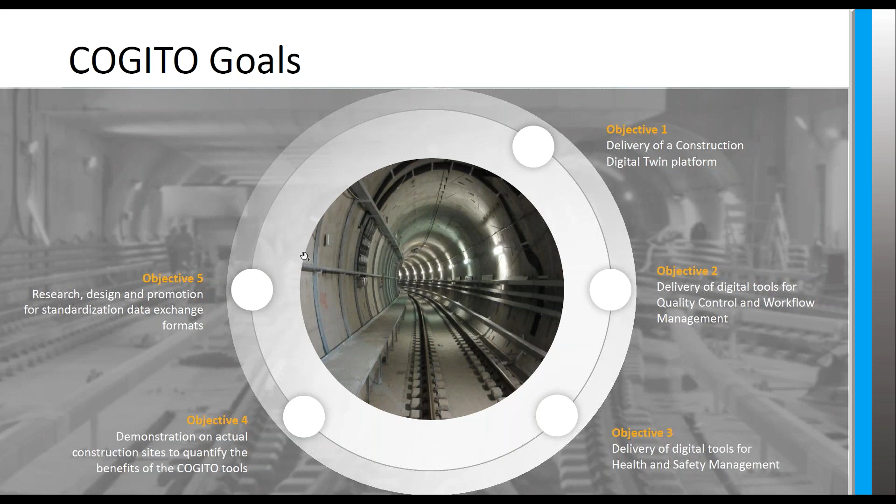The fifth business exploitation and knowledge transfer objective, to research, design, and promote the data exchange formats that facilitate the interoperability of the construction digital twins with future evolutions of the building information model to relevant standardization bodies. And finally, to promote the adoption of the COGITO solution through intense dissemination and knowledge transfer of the project outcomes toward the targeted stakeholders, reaching out to audiences within and beyond the European Union.

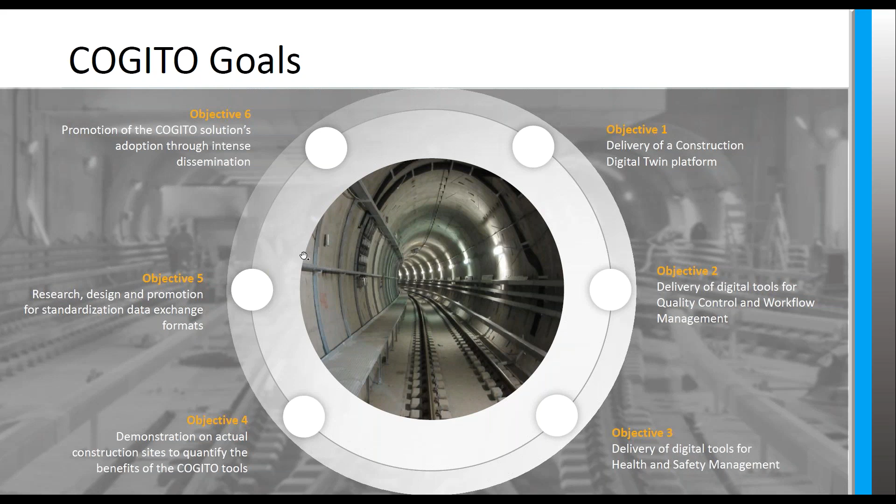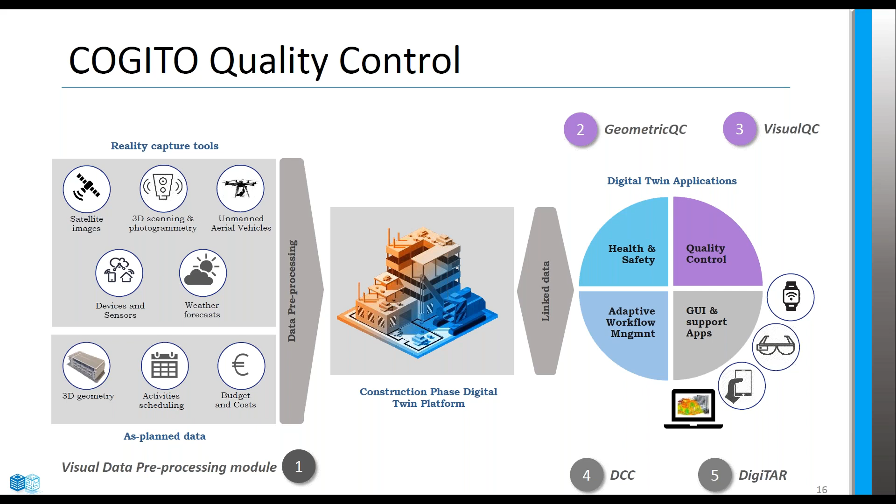Today, we are presenting the quality control services and relevant user interfaces, starting with the visual data preprocessing module, responsible for acquiring the data required as input for the quality control components, the geometric quality control and the visual quality control services to semi-automatically detect deviations and defects of erected construction elements, and finally DigiTAR and DCC for visualization purposes of the quality control results. And that's it for the introduction of the COGITO project.

I'll pass the floor to Agnieszka with regards to the first poll that we mentioned before. Yes, we have 2 questions in the beginning, just to know your background, so we can move to the first question. What do you know about digital twin? We just want to know what is your background. Do you have the knowledge already? And do you have maybe a practical experience with digital twin? So please vote.

If we have already the answers, we can, I think, move to the next question. What do you know? Now we have the answers here. So most of you know the concept. That's very good, as we will be getting into the details in the remaining part of the presentation in the webinar.

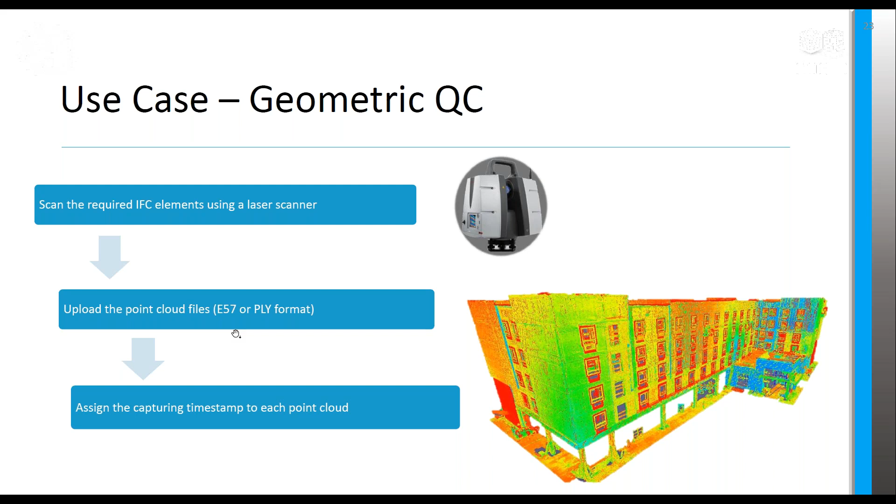Now, regarding the use case of the geometric quality control, the user first scans the required IFC elements using a laser scanner and provides, as you can see here on the right, the 3D scanned model of the building. And then these are uploaded as an E57 or a PLY format file using the visual data preprocessing toolkit front end. They are assigned the capturing timestamp, and then they are forwarded to the digital twin platform.

On the visual quality control side, a photograph of the required IFC elements is associated with the element. The metadata goes along with the image in question. Some processing is performed if necessary, for example, cropping an image or filtering some element, and then they are uploaded to the digital twin platform as well.

Now, the image processing side, as I said, involves cropping, resizing, Gaussian blurring, contrast modification, or brightness modification. These are additive, so a user can select one or all of these to perform on its image. And here we can see an example of how this works in practice. Yes, you can start the video, please.

Now, first, the user signs in with a Keycloak account that is the same throughout the entire COGITO platform. And using these credentials, they are presented with this screen, which is the selection of an existing project, and the project corresponds to the building that we are talking about. So here we have a demo of a school building, and we have different work orders here defined through another tool of COGITO that has some quality control activities ordered for this building.

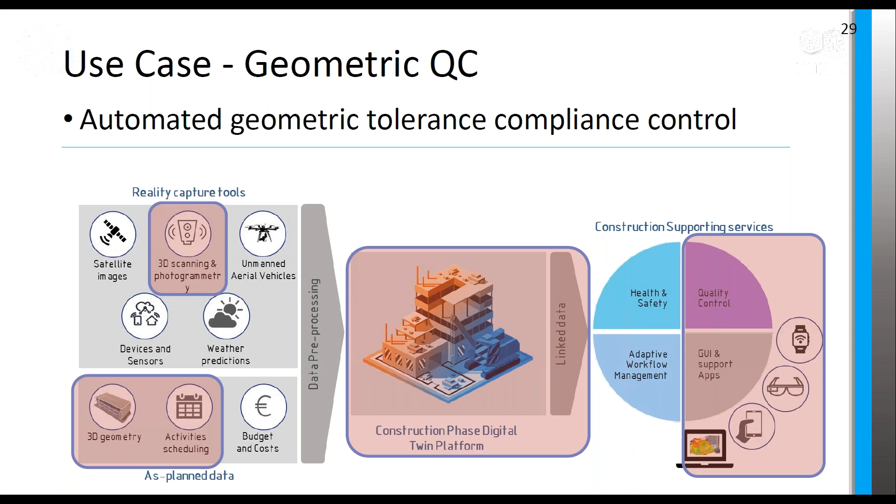So the first part is we divide it in two: the planning and then the execution of it. So during the planning stage, what we need to know is from the as-designed BIM model, and it's a 4D because it's containing the schedule of it, apart from the geometry and the materials and all that relevant metadata information.

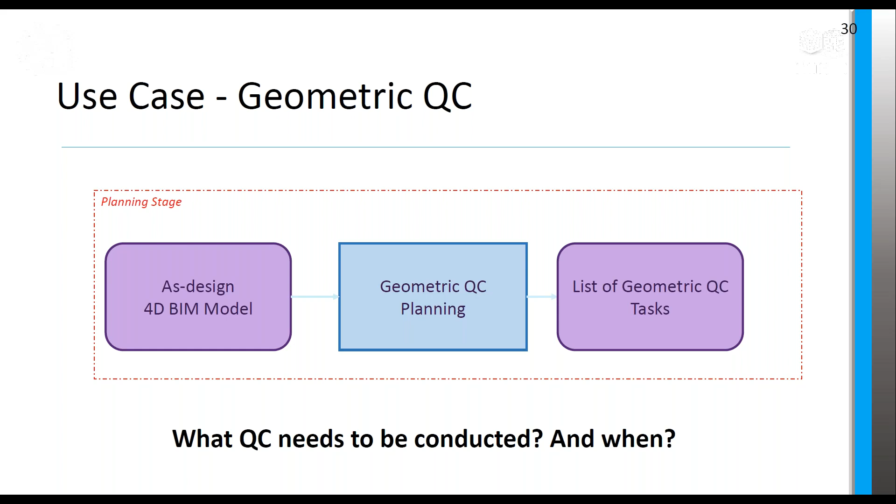We process that to extract the different quality control needs that we need to comply with during the project, and most importantly, when. So after processing it, we are going to get a list of geometric QC tasks that are going to be verified during the construction phase.

So, for example, where do we get those quality control checks that we need to do? We have different sources. The most standard one comes from the rules or specifications or regulations or norms of the different countries, but it also can come from project-specific or user-specific ones. So, for example, if your client requires a more constrained threshold for the curvature or the deviation between columns, you can put it there, and we can analyze it with that threshold instead of the ones that are in the regulations.

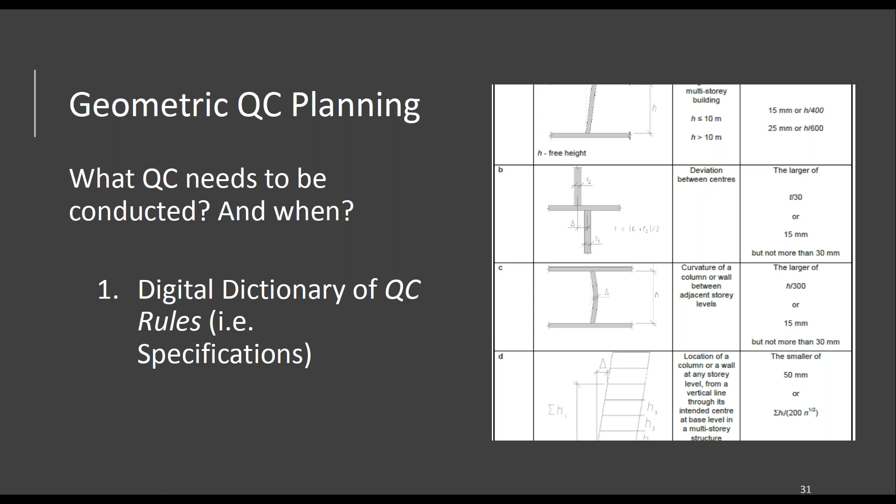So in this case, these ones are coming from the concrete regulation, and it's an ISO standard. So all those values are coming from those rules. You can see here are different rules that will need to be checked during the construction. But these rules are also specific for different elements. So for example, walls, columns, slabs, beams, or the rails for the steel cases, etc. So when you analyze the BIM model, you can extract the different rule instances that you need to check for each of the elements.

So each element will have a type and a material, which is going to be linked to the rules. Those rules, we are saying there is a dictionary of rules, or QC rules, or QC dictionary, whatever you want to call them. They are going to store some metadata. So every time that we go to the BIM model, specifically using the IFC file, we see that element and we say, okay, this element is a column, for example, and is of concrete. We need to verify all these different rules.

But there are some rules that require more than one element. For example, location between a column and a beam, whether the position between them is okay. So in that case, you need to query for both of them, and that requires some relationship between them. So for example, if we go to this IFC or BIM model, we know that we have all those different elements: the beams, columns, walls, and slabs.

And from the rules, we identify these 4 or 5 different relationships between them. So we have the stack of the columns and the walls. The physical connection is mainly between the beams and the columns. Storey adjacency, so it's like one slab on top of the other, and horizontal adjacency between the beams and columns, for example. So in this example project, we identify that there are this number of relationships, which means we are going to need to extract a lot of QCs from here.

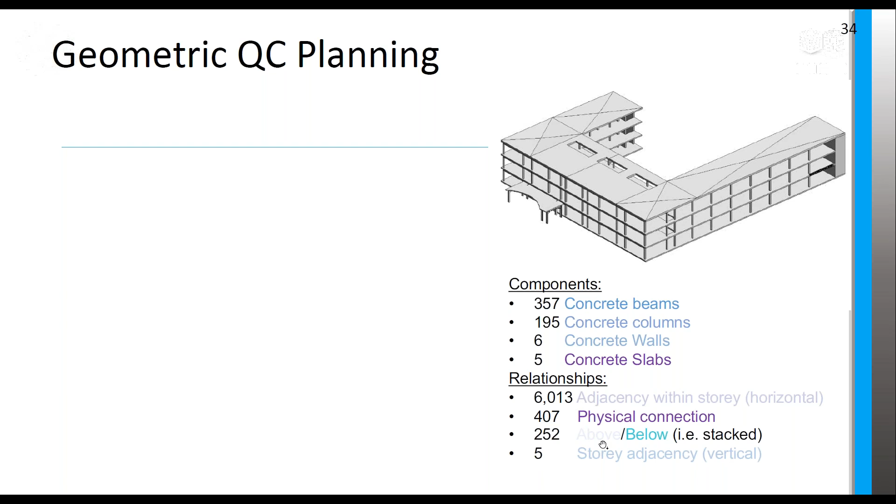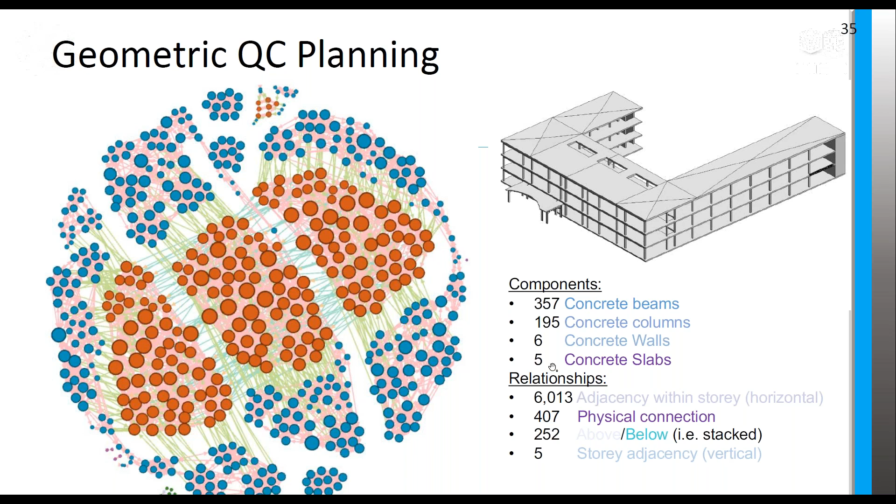But what is important is that from these relationships, this graph and the rules, we obtain a number of different QC rules that we need to verify during construction. So for example, from the dictionary that we have of 15 rules, we know that we need to comply with almost 10K different rules during the construction, which is a lot. We are pretty sure that nobody is going to inspect all of them. But if we do it automatically, we can certainly verify most of them, a huge number of them. So this is only in the planning.

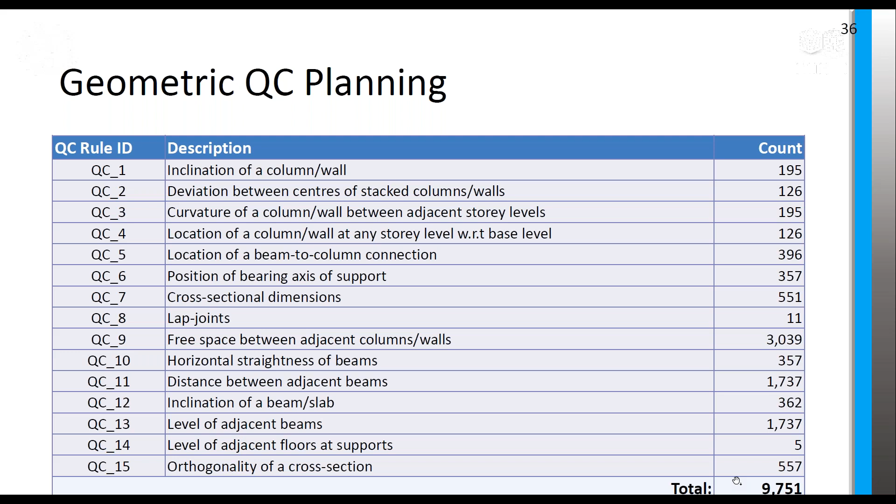But what happens during construction? During the construction stage, we need to combine that list with the as-built data and run an automatic algorithm to do the checking. What we need to do is check which of these rule instances pass, fail, or cannot be controlled because we don't have enough data for it, and why it's happening.

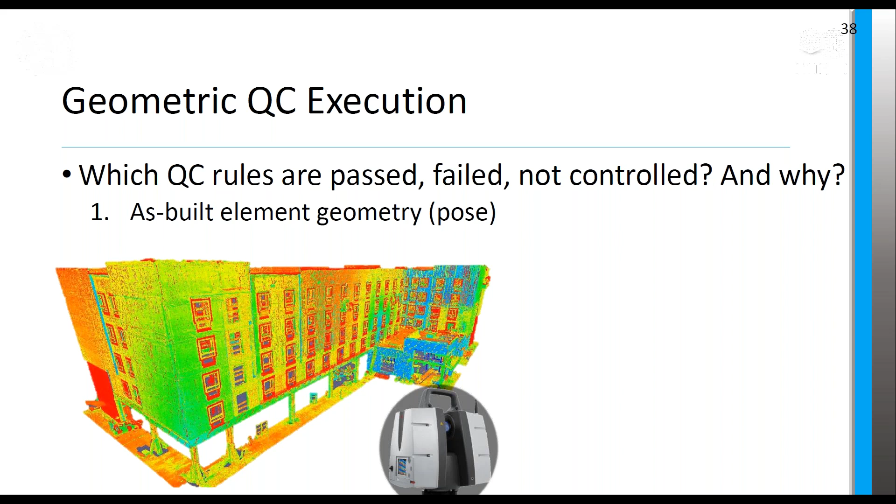So for example, we have a building, and in this case, we're going to use a laser scanner because it's more accurate. But in the future, we cannot rule out other sources like photogrammetry or the Spot robot or drones, which are going to be faster in acquiring the data. Or you can combine those technologies to be faster, for example, or have more accurate data.

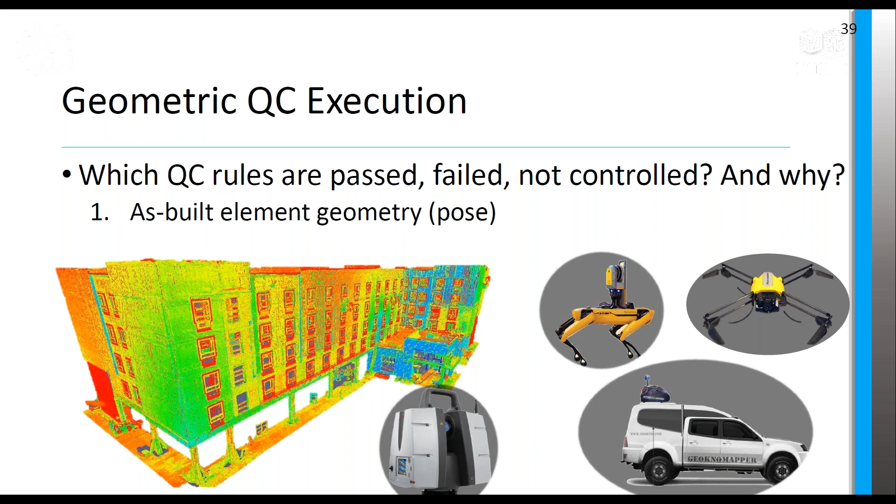So what we do for checking these rules is mainly do a matching between the elements and the design, that's the as-built data and the as-designed data that's coming from the BIM model and the TLS. And we obtain the as-built pose of those elements. So we can use that pose to check the differences and the tolerances between the as-built and the as-designed data, and the values that are on the rules.

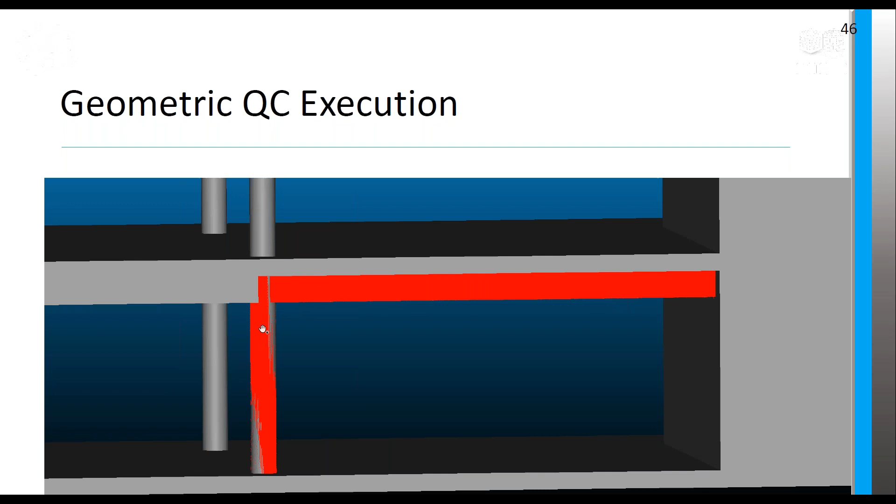But this element also was connected to the column. So it contains another QC instance, which is this one, where we have two components, and the rule refers to QC5 in the dictionary, which is beam to column location. But because it was only an inclination, the connection between them is not going to be affected, the point cloud is affected only on the vertical axis. And in this case, it was a pass. See that the tolerance was 2 centimeters and the difference is only 1.

And also we have the timestamp when we perform the QC. So the quality control staff and the project manager can see when these QC rules were verified, and obtain a report of it with more detailed information to pass it to the different authorities or the clients. And that's mainly the geometric quality control.

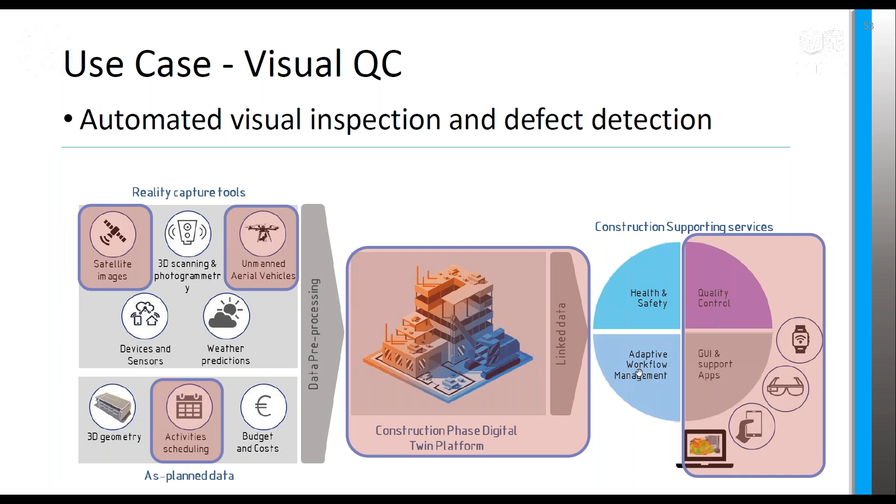So the visual quality control involves the automated visual inspection and defect detection based on 2D images. The data is coming from, for example, satellite images and unmanned aerial vehicles, and they are combined with scheduling for the visual quality control inspections through the digital twin, and then we can perform the quality control inspection and also visualize the results in different user interfaces.

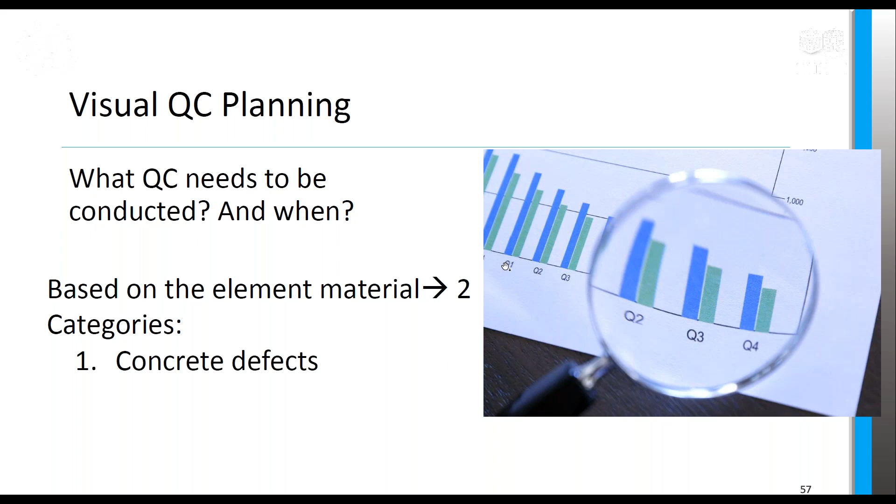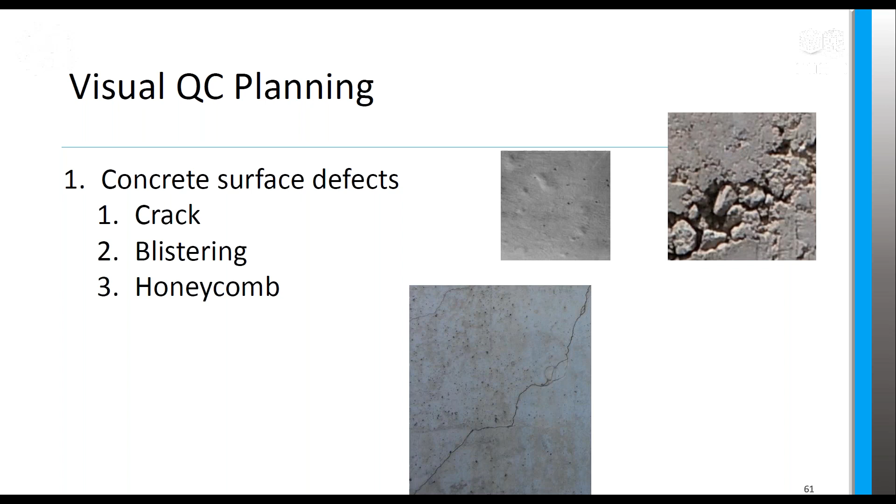Now, what are the quality control needs regarding the visual quality control? Basically, based on the elements involved in the construction, we distinguish between two different material categories: concrete defects or steel defects. For example, here we can see some of the defects that we can detect regarding concrete construction elements: cracks, blistering, honeycomb, efflorescence, or holes present in concrete.

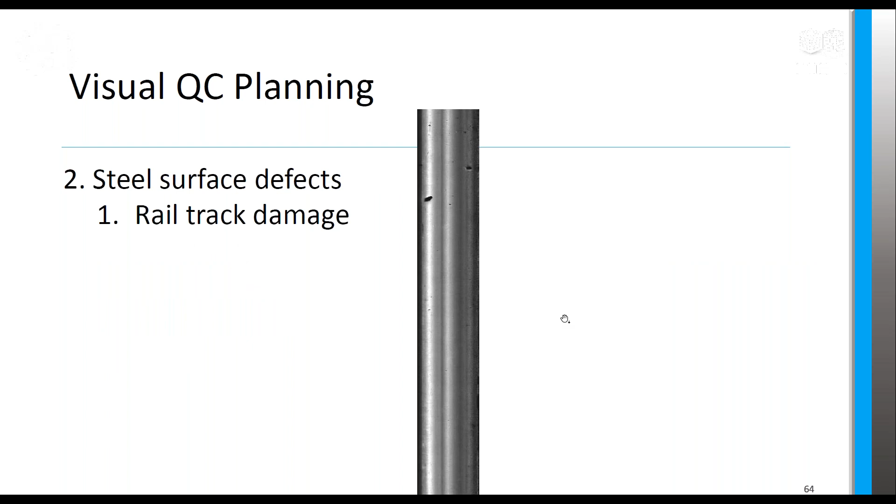Regarding the steel surfaces, the algorithms that we employ can detect defects, for example, rail track damages, pitted surfaces, patches, scratches, and things of that nature. So let's go to the use case. As Martin said earlier, we have the planning stage, and then we have the construction stage, and then we need to check what has been planned against what has been constructed.

Basically, we select the different IFC elements involved in the work orders of the quality control. And then on top of that, we can perform a detection using deep learning algorithms working on the images that we saw before. So the different results can be no defect detected, or a fail and the defect was detected with some confidence, or if the confidence is a bit low and we are not really sure, we can declare an undefined result of this activity. So we have an unknown surface material state.

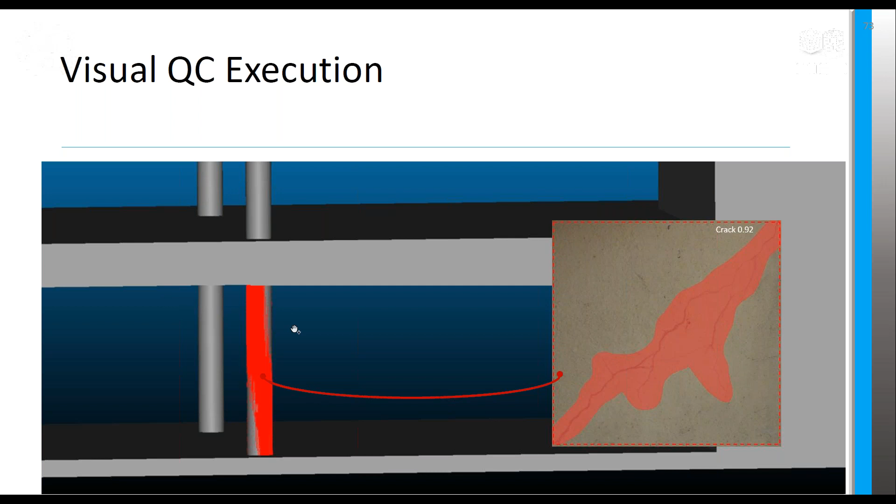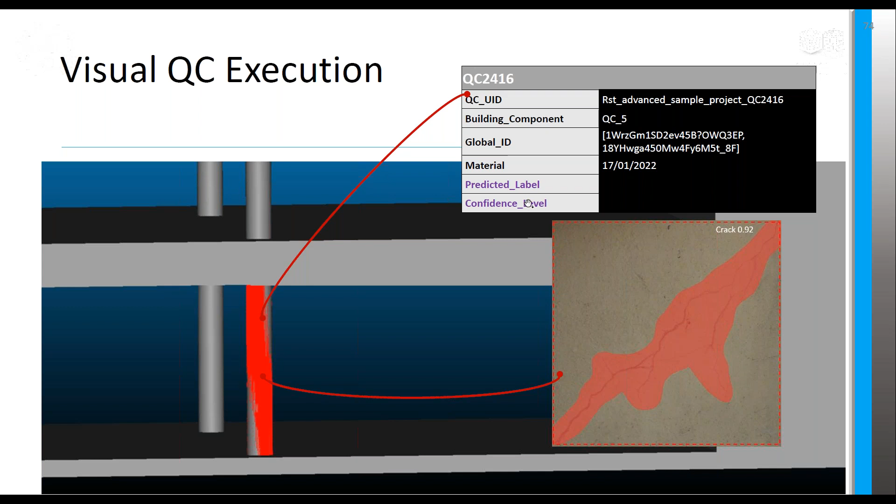So this is an example of what the algorithm performs. You can see here an annotated image with a crack detected and the confidence of 0.92, which means we are 92% sure that this is actually a crack. This corresponds, for example, to an IFC element seen here, a column, and the report that comes out of that is, as you can see here, the global ID of the element, the material was selected as concrete, and the predicted label, which is crack, and the confidence level, which is 92%.

All this, along with different elements of the COGITO project, is then passed on to different user interfaces. One of these interfaces is the DigiTAR, which is the on-site augmented reality-based digital twin information visualization and decision-making tool, which is an application running on HoloLens devices.

And the scope of this tool is first to visualize the results of the quality control components, both the geometric and the visual. Second, to visualize potential construction and site hazards for health and safety issues. And finally, to collect as-built data as part of the visual data preprocessing tool that you saw earlier, acting as a capture device, basically using the camera of the HoloLens head-mounted display.

Now, regarding the architecture of the visual quality control tool, basically we take the images coming from the visual data preprocessing toolkit, the elements coming from the digital twin platform, the work orders coming from the WODM tool of COGITO, and based on this, we can provide within DigiTAR a 3D IFC viewer, so the user can see the 3D model of the as-planned building.

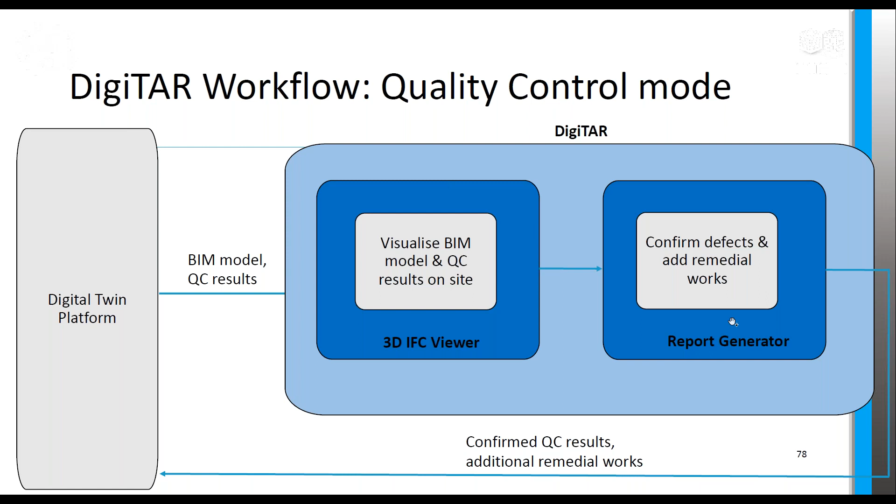The process goes like this. The user first logs in to the application, they select the construction project, and then they select the quality control mode, visual or geometric. They receive the IFC model and the QC results from the data platform. They can perform the registration of the 3D model onto the real world construction site. And then they can view the geometric and visual quality control results on top of the physical building. And finally, they can confirm or reject the quality control results and add the remedial works.

This is an example of how the 3D model is demonstrated within DigiTAR, and the quality control results are demonstrated in this kind of user interface report, where you can see the quality control rules, timestamps, description, distances, scalar results, and tolerances regarding geometry quality control results.

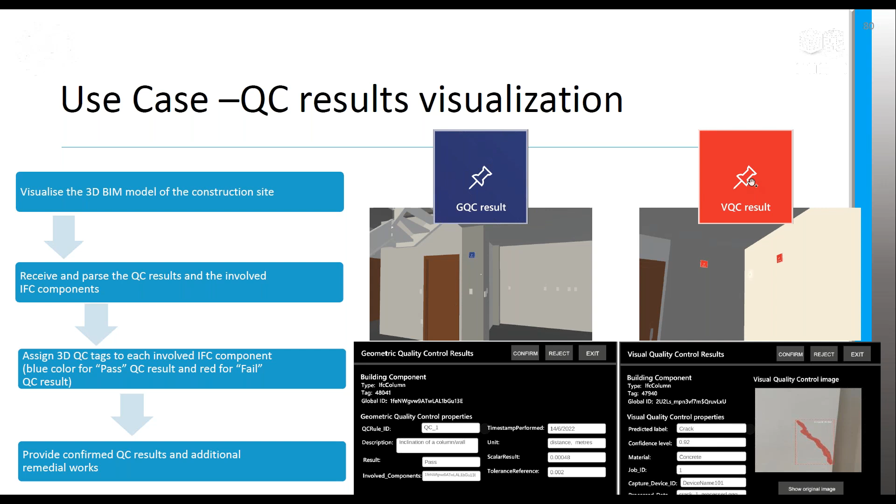And for the visual quality control results, the user can see the image as it came from the visual quality control tool, along with its annotation and the confidence level and the type of material the detection was based on. And on the top here, you can see that for a passed quality control result, you can see a blue annotation on the building, and for a failed quality control, the user can see a red annotation.

We can go on now to see a demonstration in video format, and you can see how this works on the HoloLens device. Yes, if you can start the video.

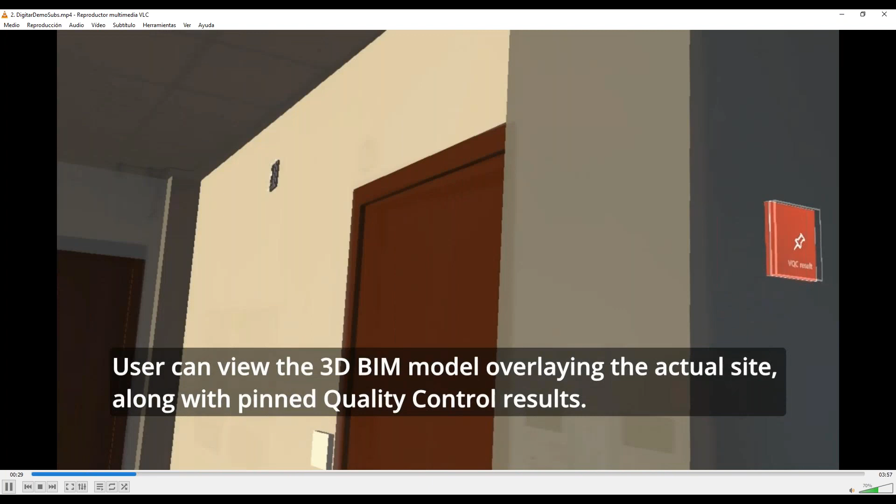So, first of all, again, with the same credentials as before, the user logs into the COGITO system. They can select the project, and they can select what type of activity they will perform: pre-processing, quality control, or safety control. In the quality control here, they can select to visualize the model on top of the building, overlaying the actual site. Here is of course not a construction site, but a demonstration area we have in CERTH.

And they can have all the visual quality control activities that we performed attached to all the elements. And you can see here the red color indicates some quality control results that have been with a fail result.

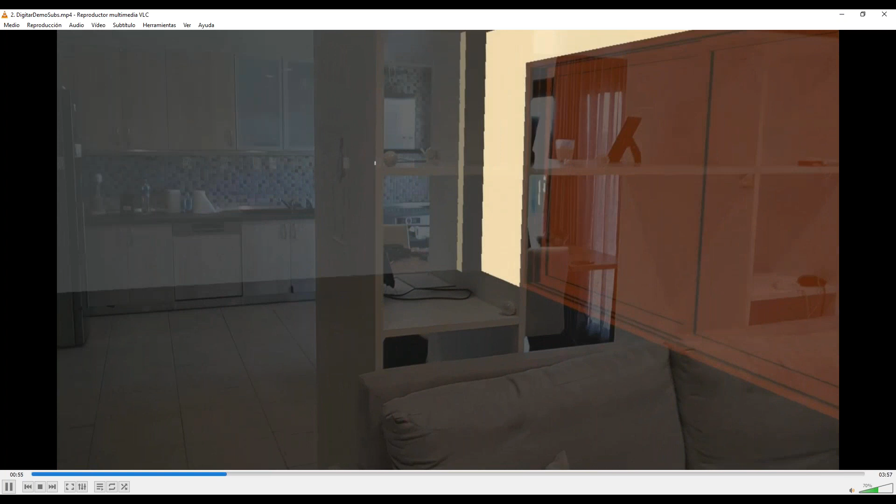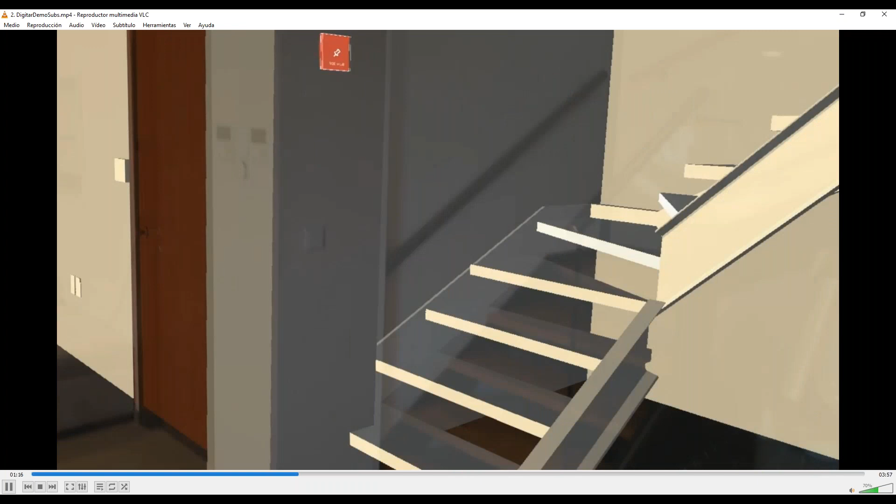And the user, as they go around, the model is registered to the actual building, and it follows the physical space. Now, the blue color results here indicate elements with the passed quality control result. And the user can also, as you will see, select to view only the results and not the building itself as a BIM model. So this makes it a bit clearer, so it doesn't have too many cluttering elements on top of each other.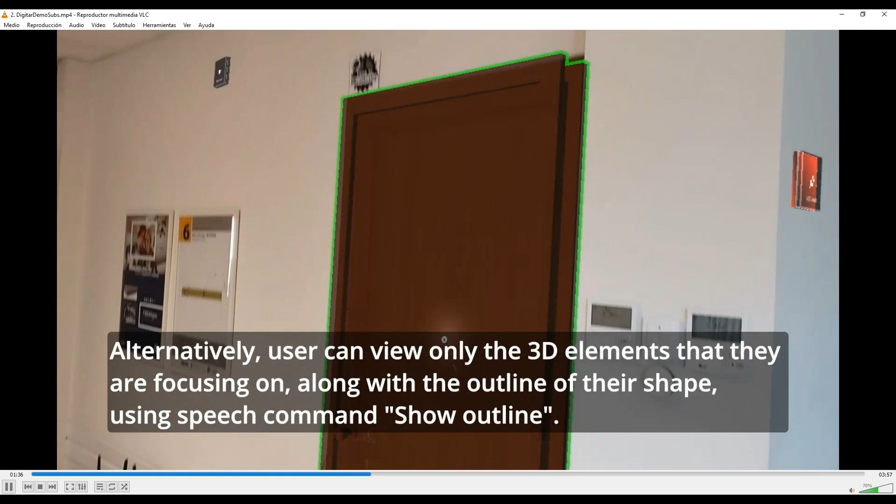And alternatively, the user can only see the 3D elements that are involved when the user looks at them. So here the user looks at this column, so it's highlighted, and a green outline comes on top of it. And here, when they focus on the door, it becomes highlighted.

It seems the video has stopped. Or is it me? Agnieszka, can you hear me? Agnieszka? Yes, Manos, the video is stopped for me as well. Video has stopped. Yeah. Can you try and see if you can restart it from the middle? Yeah. Okay. So it's fine. Okay. So yeah, it skipped a bit.

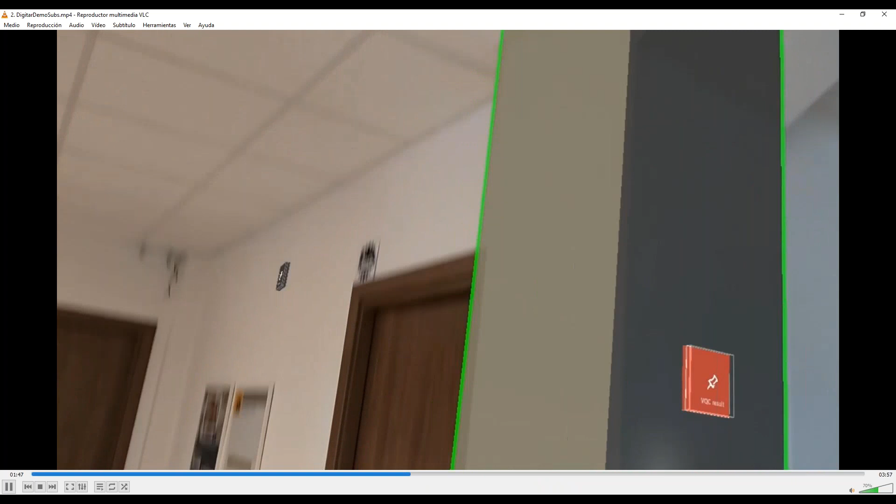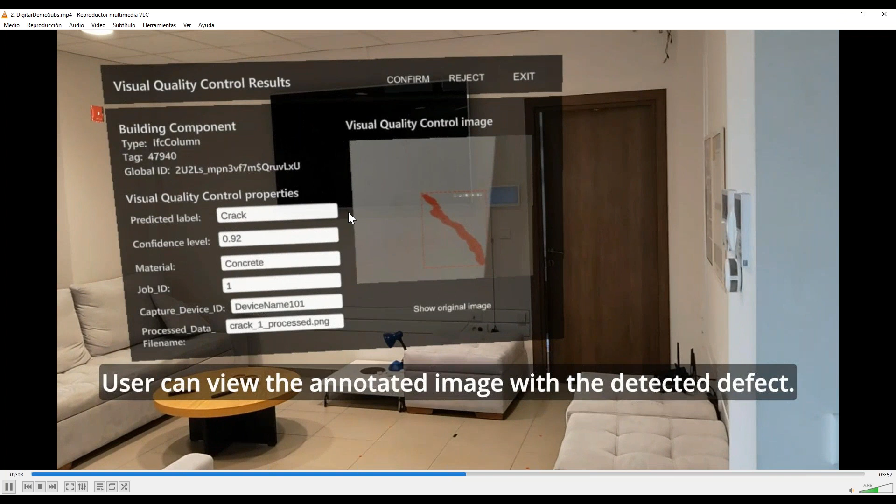So basically, we'll skip the part where the user can see the report. If you go to the middle of the video on the bar first, you can see the report where the user selects the QC result. All right, so the user can tap on a result and see what is the result of this quality control operation. You can see again here the crack, 92% sure, and this is the result as an image on the right. And then they can also see the original image that was taken from that location before the preprocessing.

And they can also confirm or reject the result and say, yes, this is actually a crack, or it's not, it's a false positive. And they can also request remedial work to be performed on this element, basically fixing the crack, filling the voids, do a rebuilding task, set a priority and the time schedule. And they can add this task into the process of the construction. This was for a visual quality control operation.

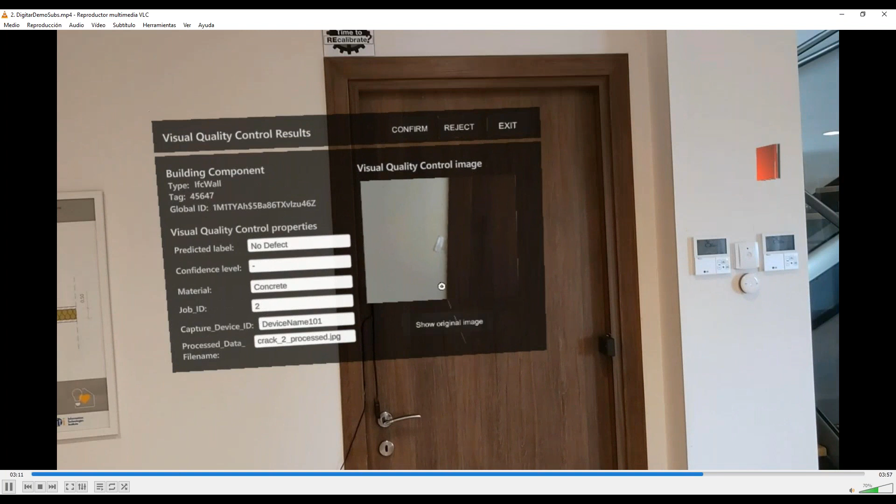Now, as you saw, the passed results are like this, so no defects were detected in this particular element. Again, this is a visual quality control result, and the user can confirm that this is actually correct. Now, here is a geometric quality control tag, and the user can select it as before. And here you see the different type of results coming from the geometric quality control process. So description, result, but also the different tolerances and the type of result for the measurement.

Again, the user here can create remedial work for this. And this is most of the functionality that we have so far implemented in the tool, the DigiTAR user interface. Thank you.

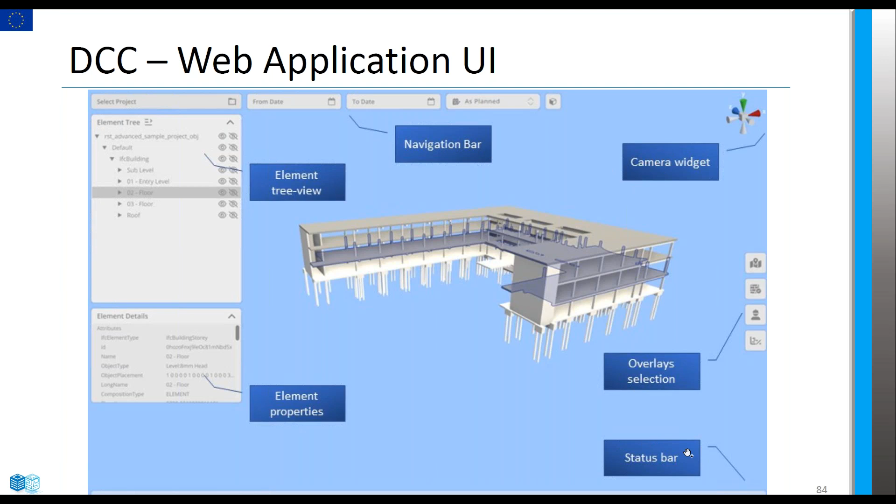In this slide, a screenshot from the digital command center environment illustrates the main parts of the user interface, including the element tree view, the element properties, the navigation bar, the camera widget, the overlay selection, and the status bar. And I'm going to analyze each of them a bit further.

The element tree view provides a hierarchical view of all elements in the BIM model, and allows the user to show or hide the elements that they choose. Each item in the tree view has separate show and hide buttons, by clicking the eye or the crossed eye button displayed here.

Regarding the grouping of elements, the element tree provides two modes of operation. The default mode groups all elements according to their position in the BIM hierarchy, while the alternate grouping mode is by element type. As we see here, for example, different elements are beams, building, columns, etc.

The filter selection of DCC controls provides two types of filtering: the schedule-based and the box-based. Here is the schedule-based and here's the box-based. With regards to the schedule-based, the user has the option to filter the displayed elements by a date range, and the time range taken into account during the filtering can either refer to the as-planned data or the as-built data of the elements.

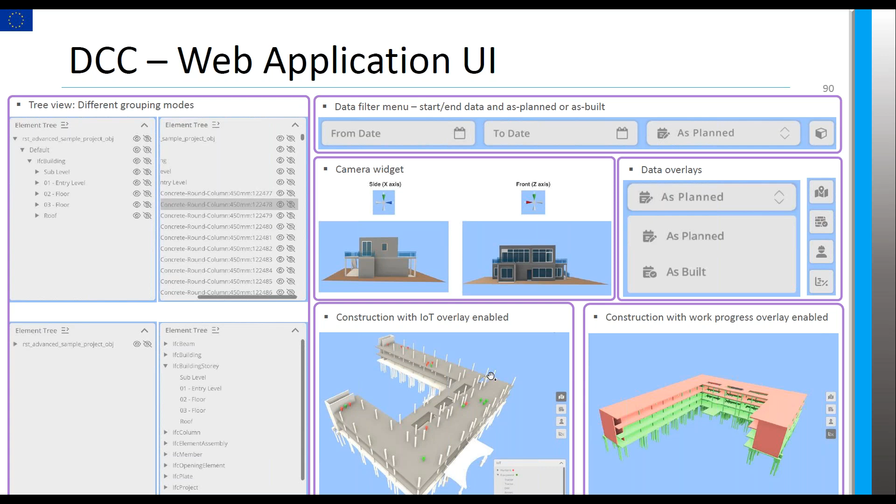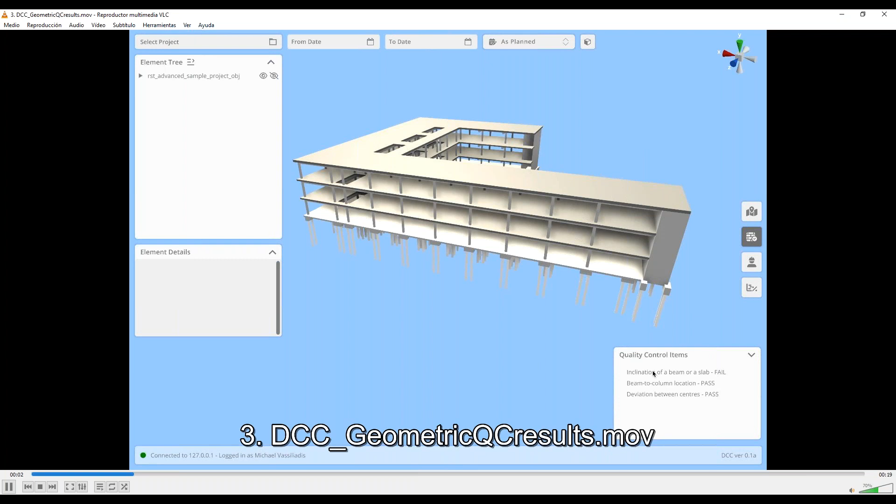The very last slide, sorry, is about the geometric quality control results displayed in DCC. And I'll ask, if possible, to run the video that we have prepared. I didn't provide any information about the process that we follow to log in, etc. Here we are displaying the results that were presented earlier by Martin: colored red, the elements that failed, and green, the elements whose quality control has passed.